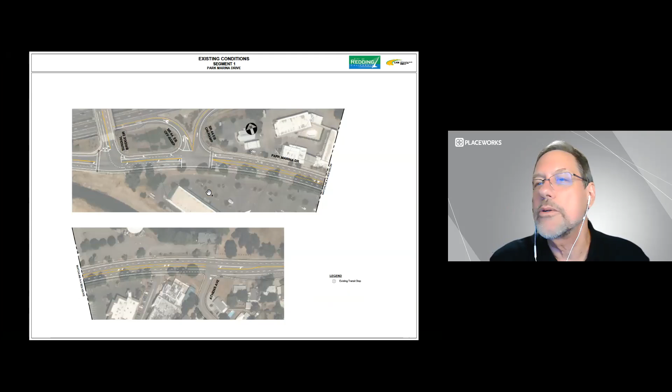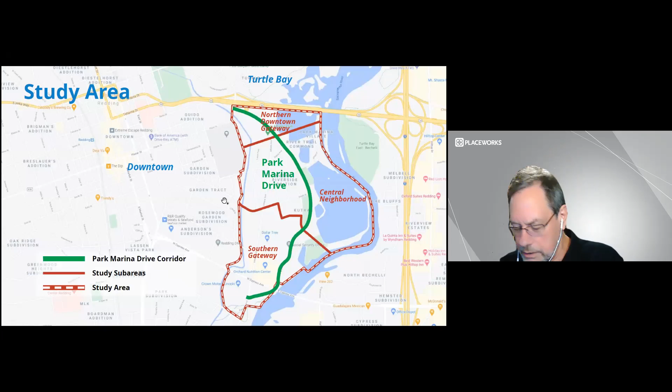Okay, so does anyone have, I guess I'll open it up. Does anyone have any questions or comments about the overall study area or any general questions? Feel free.

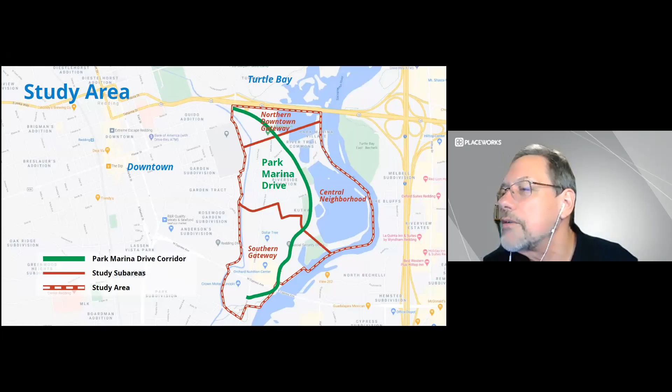Yes, okay, so I saw someone with their hand up. Can you unmute yourself and just ask a question? Hi, my name's Carol. Hi, Carol.

The thing that I'm curious about is it seems like all of this is kind of contingent on what the ideas are going forward on how the space along the river is going to be used, because that would make a huge difference in how the road is planned and whether there's parking along there or how that's done. So is there some kind of a plan in the works, or can you tell us anything about that?

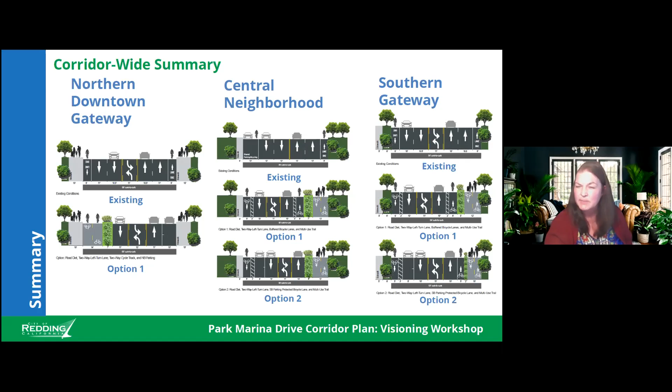So I think John could probably tag on to this. I'll start. We do have the grant. There's unknowns about what's going to be happening along the river, and we do want to find ways to improve the corridor as much as we can for the existing conditions. So the team is trying our best to make a solution that would be flexible for new development that might come in the future, to take advantage of the corridor as well. So the idea here is trying to keep it as flexible as possible.

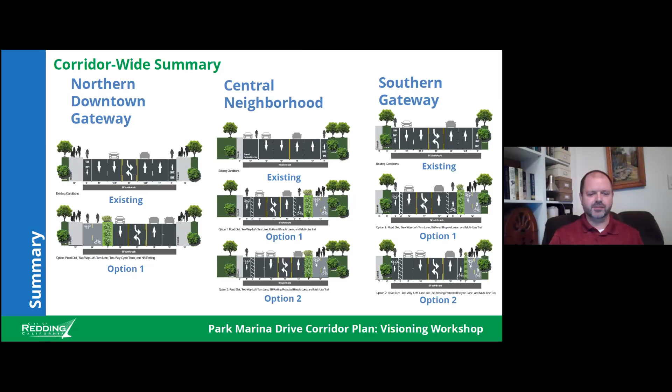John, do you want to add to that? Yeah, that's right, Bruce. We don't have any particular development in mind. We just know that in general, in the future, there will be development there. So these concepts just try to accommodate future development as it occurs, but we don't have any specific development in mind. The idea is to bring the bicycles and the pedestrians and serve the vehicles in a safe and attractive way so that it can help enhance the development that may be coming in the future.

Bruce or John, if I may, sorry, I'm not finding my icon to raise my hand, but my name's Cameron Middleton. I'm a representative for Chris Koutras, and I can address that at least slightly if need be. Okay, Cameron, why don't you talk a little briefly about that?

So maybe people should be aware that the Koutras family does own and control some of the property along Park Marina Drive. Go ahead, Cameron. Yeah, Bruce, I just had spoken with Chris about this prior. The Koutras family owns not all, but the majority of the property on the east side of Park Marina, coming from 44 down to just prior to Locust. So just give a little update from his standpoint.

Two things. One is the area has been encumbered by leases and subleases for some time, generations, frankly, and those leases are expiring at the end of the year. So what we are currently working on right now is that transition, which is actually fairly complex. Again, a lot of tenants and subtenants that are being talked to, just to ensure a smooth transition at the moment. And so that has really been our focus here in these past few months and in the coming couple of months.

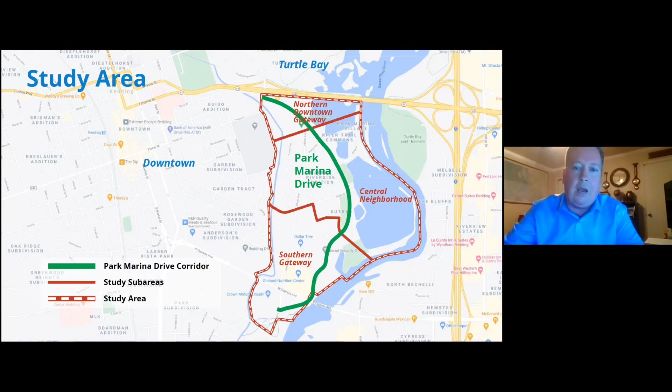Okay, thank you Cameron. Let me say a couple things about that. Clearly that's an effort that will probably take years if there are to be significant changes in the corridor. Tonight's exercise is really to look at the street itself, knowing the team will need to coordinate with future land uses as the project continues, and the city into the future, even after the project is in plan form, which will be middle or late-middle next year.

So it will be good for us to get your input about the corridor in these segments, to get a general idea of what you prefer to see in the Park Marina Drive corridor within the street right-of-way. In the future it will probably need to be adjusted to accommodate any changes, but it's a worthwhile exercise, I believe, to go ahead and do some visioning about what would be appropriate for the corridor.

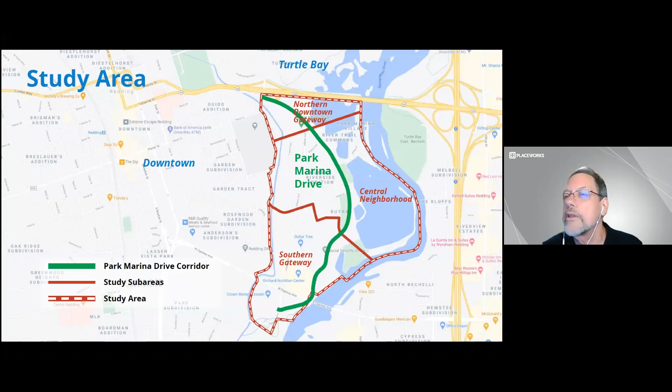I guess, okay, this is Ann Thomas. Maybe I'll just make a quick comment. Given the business uses we expect, as Cameron was just describing - restaurants, tourism, hotels - what I really like about the different examples you've given us, and what we see here, is that you're continuing the trail-like experience all the way along this corridor, which is so important to tourism. It's really essential that no matter which one we pick, we keep that trail-like experience for people of all ages, for the businesses that Cameron and Koutras are looking to the future for.

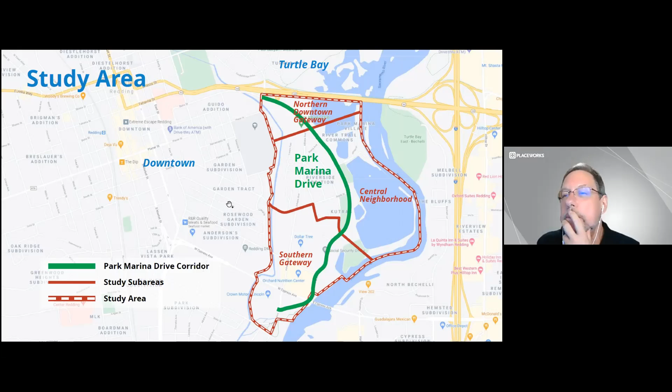Well said, and good to keep in mind. I think that's a great segue. Why don't we talk about some specifics here, I'll start. So again, this is the north end. Here's the on and off ramps of the 44, and this is the Sundial Bridge Drive, okay?

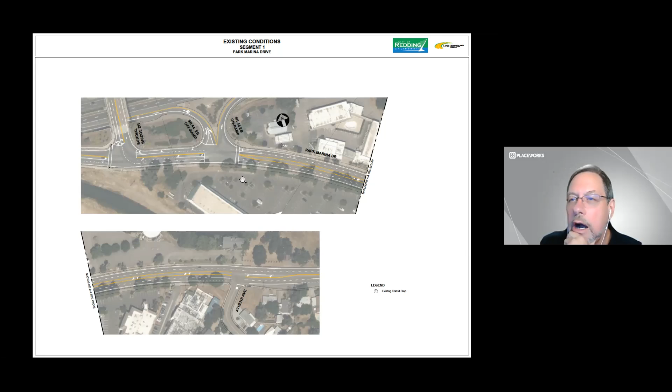There's a separate project happening over here to improve Butte for bicycle access that the city is doing. So this is going to become, or has the potential to become, an important piece of the network of bicycle connectivity. Looking at the concepts...

In this case, this gray line right here is a two-way multi-use path, so it would be usable by cyclists and pedestrians. There's a buffer between traffic and the path in this scheme. There would be other intersection improvements, such as a crossing here, and the city's plan is to bring bicycle connectivity here on this side of Butte, I believe - well, no, it looks like it's going to be on this side.

Okay, and then it'll cross Butte or Park Marina and go across the bridge. So this needs to be a good crossing - a good crossing for pedestrians - but really the major effort here is going to be this multi-use path along the west side of the street, continuing along to a roundabout at Athens Avenue. You guys are familiar, I think Redding has now done a couple of roundabouts. It's a great way to move traffic in a consistent flow, but not speeding.

So you don't wait at signals, but you continue through the roundabout no matter which direction you're going. And there's data that shows it's really safer, not only for bicycles and pedestrians to cross a roundabout, but also for vehicles. You find there are fewer accidents at a roundabout intersection than a signalized intersection.

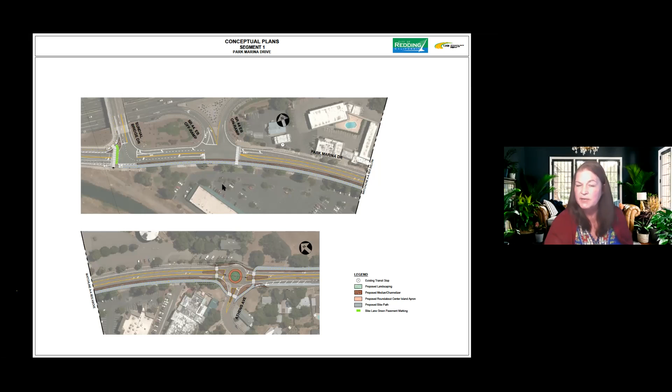I was actually not referring to over 44, I was just talking about these connections, these crossings that you have here now. Much smaller in type. Yeah, it certainly would be easier to achieve a pedestrian bridge, but studies show that oftentimes, unless you make it super easy to get up on a bridge to cross, most people would rather cross at grade than go up and across a bridge. That's findings people have found from other locations. But oftentimes, if a bridge could be made so that, say, some topography allows you to walk straight across, that would certainly improve the benefit of it.

Do other people have any ideas about a pedestrian bridge, support or non-support? Who else wants to talk about that?

Well, this is Anne. I kind of agree with what you're saying about a pedestrian bridge seeming more trouble than it's worth to people when they're walking sometimes. And it's costly to make it also serve people on bikes. Not that, you know, but if we have the money, maybe that's an interesting idea.

What I like about what you've done here is that you make the crossing with the roundabout. So we know we need to get people to the other side of the street so they don't cross in front of 44 and the on-ramps. And what's often not recognized if you're not here is that heading towards Turtle Bay, that's also a hill. So non-athletic cyclists don't want to climb that hill in the middle of traffic. With the roundabout, you make it easy for people to cross to the other side of the street, whether they're walking or biking, and make that hill climb in a safe space.

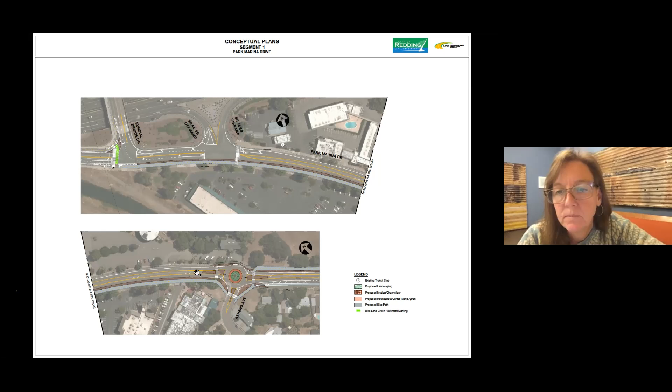Yeah, thank you, Anne. I don't know that I fully pointed that out, but what she's talking about is the natural place for a trail - we'll see this in the central and southern segment - is really on the eastern side, the river side, right? You'd rather bring that trail all the way up Park Marina Drive, but then you reach this point, and this is a very dangerous intersection for pedestrians and bicycles to cross.

So if there is a roundabout, there's a way to bring the trail users up and across and continuing up on the other side of the street. So it would be, you know, order of magnitude safer for this configuration. So thank you for pointing that out.

Other thoughts? Anybody about this segment? Bruce, this is Julie Winter, and so I would agree with Anne. I think what you've laid out here is actually excellent. I like the multi-use path, and this looks safe and reasonable for cost. So I would echo, I think this is a great plan going forward for this section.

I do want to point out Kathy Kakiuchi is on the call, and her microphone's not working. She asked 2 questions, Bruce. One is, will the streets be maintained, this project be maintained by the city? And the second question was, was an environmental study done?

Good question, I'll leave that to you. John can pitch in, but this is all proposed to be in the right-of-way of Park Marina Drive. And it's city right-of-way, so the city would maintain, they currently maintain, and they would continue to maintain. John, is that correct? Yeah, that's correct.

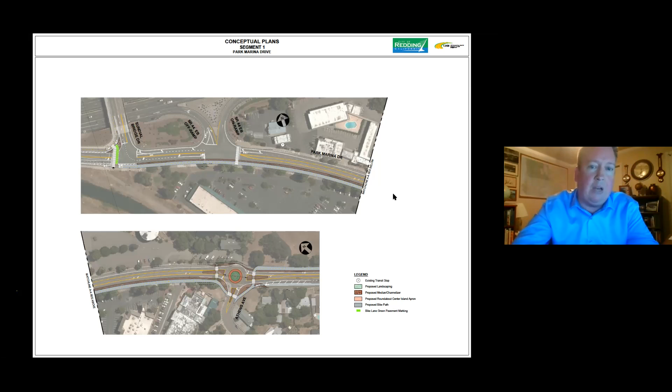I just want to echo Janice's concern a bit, with regards to backup both on Butte to the west and also on Park Marina to the east, and therefore 44, which we already do get. I wonder about the constriction of that northbound lane for some of those larger, well-attended events we have at the Civic, and what that may do in terms of backup.

Thank you for that, Cameron. Clearly there will need to be analysis to make sure things will work, not only day-to-day, but given there used to be, and hopefully in the future will be, fairly large events in Turtle Bay. I think that's an excellent point too.

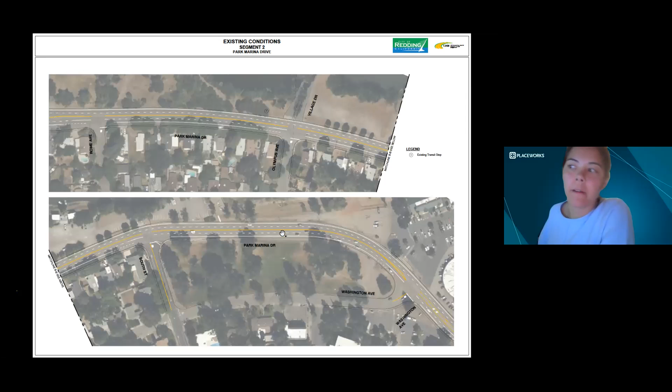This is an interesting concept in the middle. Kutras Park is here. There's an idea about having the multi-use path and also a cycle track on the street. So a bike lane in one direction and a cycle track on the other side, with parking remaining in front of the houses. The bicycles would run between the parked cars and the curb in this concept.

I mentioned the multi-use path on the riverside of Park Marina. So, yes, anybody want... okay. That is a concept we're looking into.

The other concept is potentially diverting traffic onto South and Washington going south, or onto Washington and South going north, to allow for a more capacious Park Marina Drive, with more potential for transit, bicycles, and pedestrians to use this segment. So that's the concept we're looking at: one concept without this bypass, and then the concept with the diversion and the bypass. Thoughts, anybody?

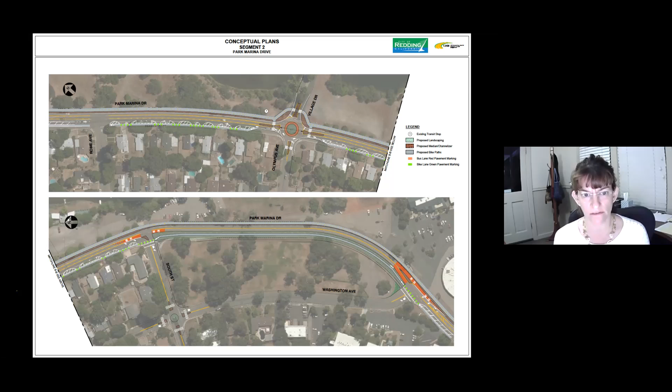On the top segment where the roundabout is at Village Drive and Olympus Avenue, I manage the 50-unit apartment complex on the northern driveway, and there are 8 residential units on the southern driveway of Village Drive that will soon be part of that ground lease that's expiring.

If by chance traffic makes a wrong turn off of that roundabout, if they get confused and end up on Village Drive, if it's an RV, a truck, or pulling any kind of tow vehicle, it's going to be ugly and possibly very dangerous because there's nowhere for large vehicles to turn around in there. There are carports that have been crashed into many times before, in both of those sections.

So I don't know if that can be solved with signage if this turns out to be one of the preferred plans. But that's something definitely to think about - it's a residential area, it's tight. If somebody makes a wrong turn in a big vehicle, it's going to be a bad situation real quick on both of those driveways.

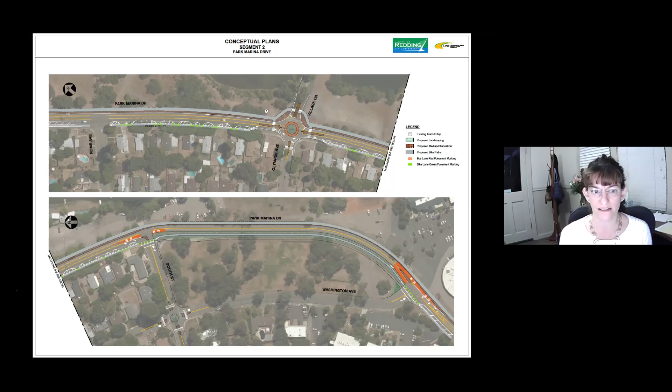You're a wealth of good comments. Michelle, are you able to capture that comment? Do you understand what she's saying, that an RV coming along here that by mistake gets on this street is really going to have a problem getting back out? I think that's very useful knowledge for us to have.

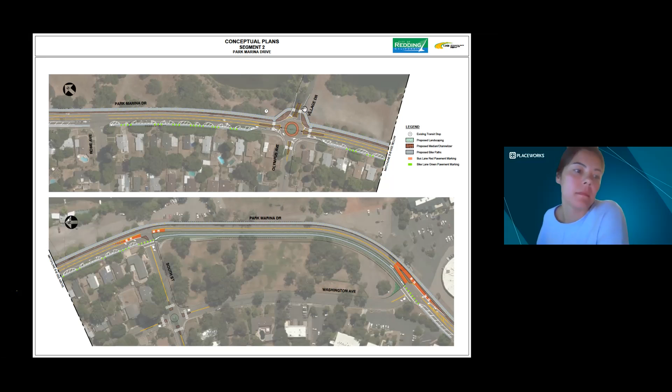I know we don't have a lot more time, but let's get some ideas about either the roundabout arrangement in this concept, or the other concept, which is mostly on-street and non-diverted. So, do we have Bruce?

Cameron? Yeah, two quick things. First, with regards to the diversion onto Washington Avenue, I know it's something Mr. Koutras has spoken about with the city previously, and something he'd like to look into is not only a partial diversion onto Washington, but a complete diversion onto Washington.

And I think that's something we would at least want to study and take a look at, thereby vacating that entire stretch of Park Marina from south to Washington and bringing all of the traffic through there, really opening up a larger contiguous piece that we would be able to take advantage of.

Second thing, with regards to roundabouts, generally speaking I'm an advocate of them and do like roundabouts. What I've noticed is that especially when you have two of them, what they do is very efficiently keep traffic moving, rather than stoplights, which actually stop and create gaps.

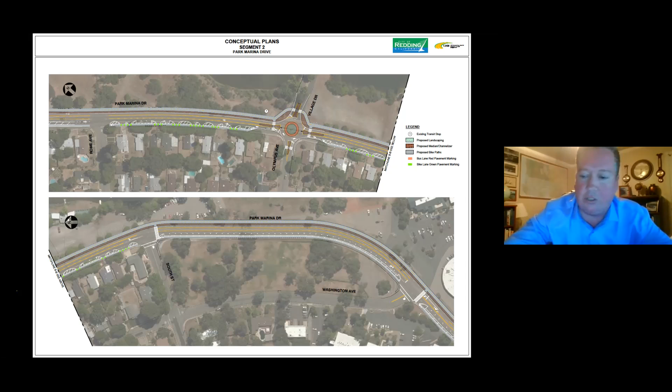That's certainly a good idea and something to move forward with. Okay, thanks, Cameron. Thank you. Let's hear from someone else. Who has a comment or a question about this segment that hasn't spoken yet? Is there anybody? Yeah, Bruce, this is Bob Getz.

Hi, Bob. You know, I've listened to this, and basically you're cutting from 4 lanes to 2 lanes. The earlier comment about COVID-19 is right on, that the traffic is lighter today than it has been in the past. I've seen backups off of 44 trying to get onto Park Marina, and if you cut that down to one lane, that's going to be an issue.

Roundabouts, I just don't feel it fits there. I know everybody's in love with them, but I just don't see it.

And I think the main thing, my comment, is if there is truly going to be development in, let's say, the next 5 years, or even the next 10 years, that would create — if there's hotels and restaurants and other things that the Koutras family would develop — that's going to create additional traffic. So you may have to revisit this and redo the whole thing at that point. I would really believe that it would be wise to wait a year, unless — I mean, the bike lanes are there today. I see them every day, bicyclists going by.

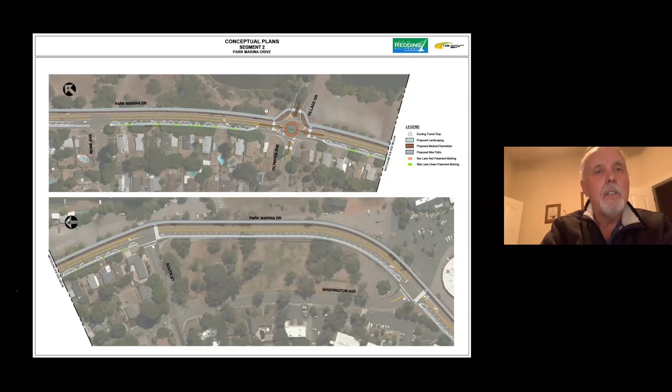The point you brought up a couple of times, a multi-use pedestrian bike path, that really doesn't work in my mind, because I walk the river trail all the time. So you have a differential of speed — bicycles going 20, 25 miles per hour, pedestrians going 2, 3, 4 miles an hour. I think it would be prudent to wait to see what the development plans are before you redesign, and especially put in roundabouts. Okay, thanks, Bob.

Anybody out there in the room that wants to say anything about what Bob just said? This is Ayla Tucker. My comments partially build onto Robert's comments and also onto Cameron's comments in regard to the roundabout.

I personally like roundabouts. I think when done in the right environment and the right way, they're great. I'd encourage extra thought if roundabouts are included in the end plan, that enhanced ADA features are considered, so members of the public who cross multiple crosswalks within a roundabout can do so safely. For those visually impaired or more immobile who cross at a slower pace, I'd encourage features that go above and beyond typical ADA compliance, to ensure the safety of community members so they can fully enjoy this Park Marina Drive area. That was Ayla.

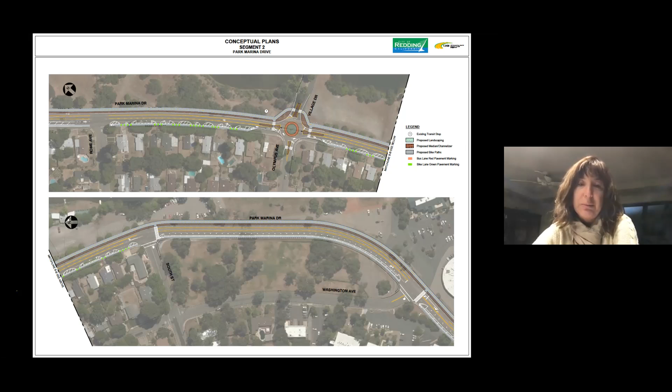Okay, thank you. Anybody else have anything to say about the number of lanes? This is David Schlegel, I just joined tonight. I think there's too many lanes on Park Marina right now, it's way too car-centric. If we're going to make it a place for people to gather, and if they're going to develop the waterfront, we need to slow down the cars. We can still have parking, but we need shorter crosswalks for people to go back and forth, and more space for bikes and people. That's how you create vibrant places.

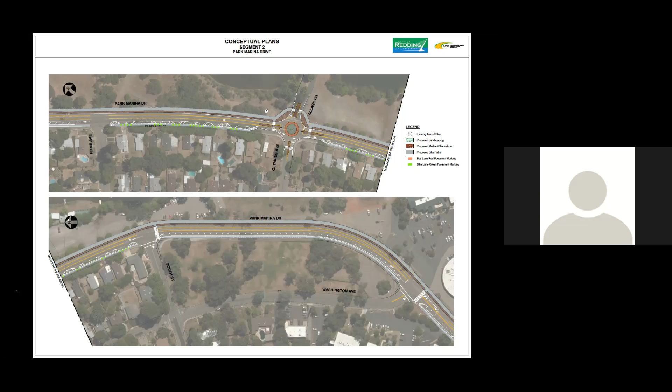Okay, thanks David, anybody else? Yeah, I want to echo that. This is Joshua Johnson. I like the roundabouts for a lot of reasons, but one thing I wonder is what the data shows, roundabouts versus stoplights. I haven't seen that, and whether it actually allows for fewer lanes because the flow is better. Do you have any of that data to share that might help inform us?

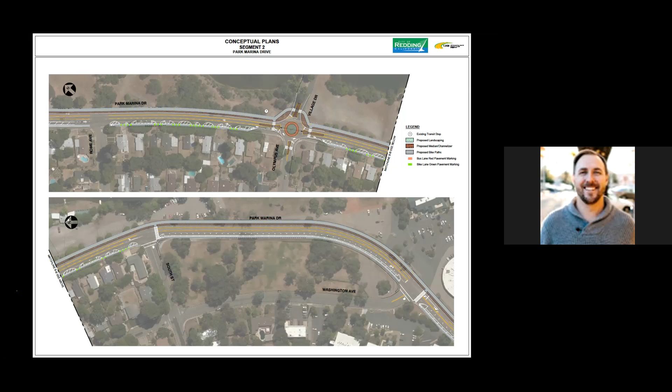Yeah, maybe we could bring that back after this meeting, in consultation with staff, if we're going to continue with an alternative that has roundabouts, we'll bring back some data showing that. Oftentimes roundabouts are used in concert with a road diet project, it's pretty common, and they've been shown to work pretty well together.

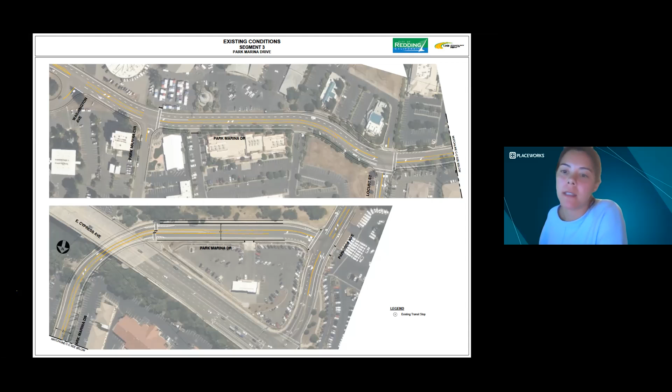Bruce, we just got a comment from Josh that I thought was interesting. He brings up the point about suggesting to bring art into the roundabouts. Art in the roundabouts, okay, that's a good comment.

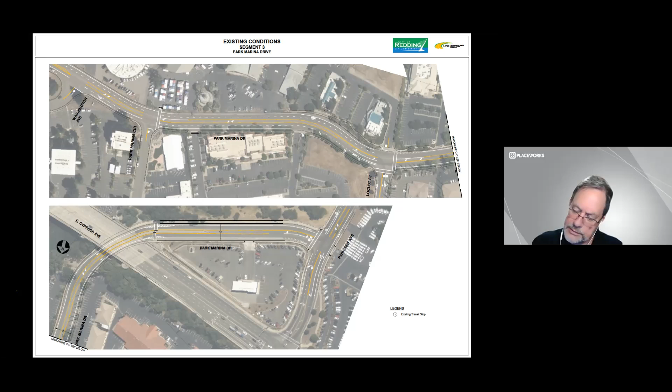If we have a quick second, I can chime in on the question regarding traffic signals and roundabouts. Okay, go ahead, who is this? Rudy with TJKM, sorry. Hi Rudy, I didn't recognize you. Okay go ahead, I'm just sneaking around through the break room, sorry.

So one of the things with the roundabout is it reduces the points of conflict within an intersection because it dictates the movement. Everyone flows in a consistent manner. So the entry into a roundabout is much more deliberate, and you're mainly looking out for traffic coming from your left side, compared to negotiating a typical traffic signal where you're watching for the lights, and you have a lot more conflict points depending on the type of signal you have. If you have a permissive left turn compared to a protected left turn, and then your right turning vehicles have to be mindful of oncoming traffic if they're making a right turn on red. So those are just a high level discussion on the main differences between them. We can definitely provide a more in-depth analysis on that further down the line.

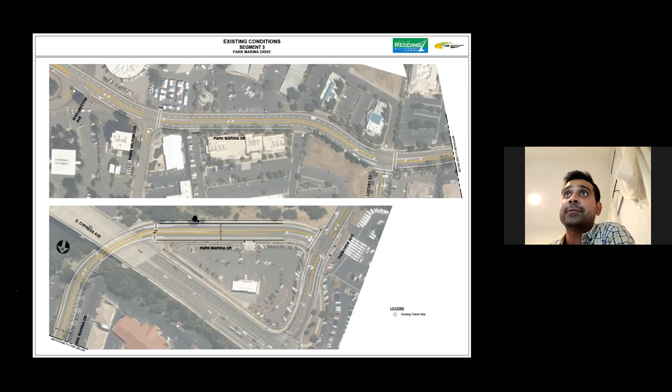Hey Rudy, I wanted to mention a good comment someone made about the first roundabout in the north, and it's worth looking into. There is a point that especially at event time, there's traffic that may back up onto Sundial Bridge Drive and back down Park Marina. I think it was Janice who was saying she's seen cars all the way down there. So it'll be good for the team to look into that issue to make sure cars don't back up even past the roundabout, because that would impact the flow there.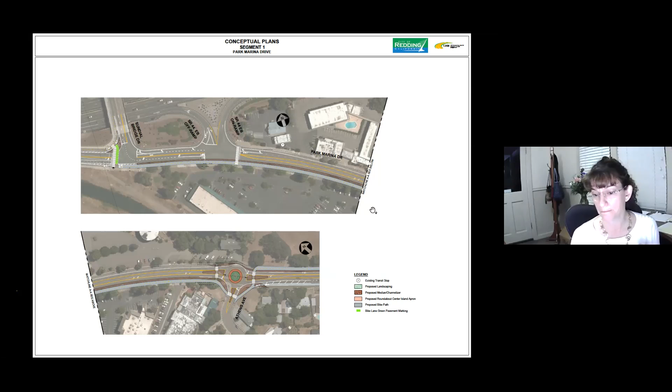That's a good point. So you're saying the queue from Sundial Bridge or from the ramps backs up southerly into the Athens Avenue intersection? Janice, for about a short time during non-COVID traffic patterns, maybe from say 5:05 to 5:20 p.m. Got it, okay, so that might be something happening with the ramps and the circulation up north. If we can improve that, that would help with the overall flow.

Yeah, I think it's a good point, and you don't want to do something that's not going to work at all times. So that said, we have 30 seconds before we leave the breakout room. Anybody else have a topic we haven't talked about? Is there anything else anybody wants to say about any of these concepts?

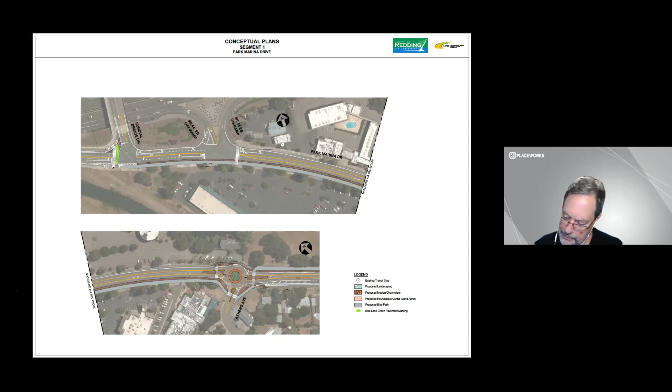Okay. So what we'll do... Hi there, I got cut off. I guess we're just forced to be back. Yeah, we were forced to be back.

Sorry, I hope you saw my broadcast message. I did, we did. It's hard to gauge, and I was in mid-sentence, so we got broken up, but that's good.

First of all, I think we had a great discussion in Group 1. Hopefully, let's see, are most people still in the meeting? It looks like there's 80 folks still here. So this is, what a great meeting.

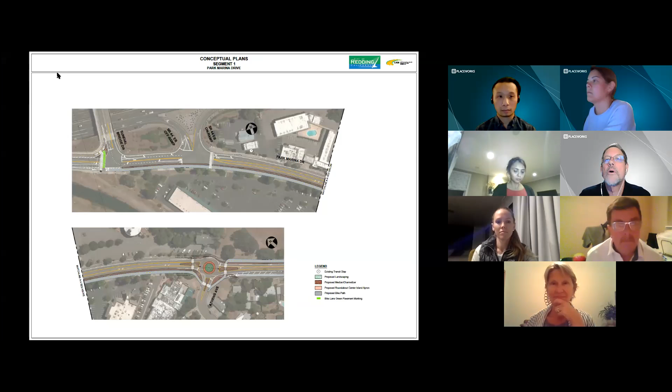And we'll start with Group 1 discussion. Michelle took these notes, we had lots of folks in the room. Should I go ahead and summarize? I've forgotten, Ruta, let's see. I guess I could just go ahead and summarize this. Does that sound okay? Yes. Okay.

So we were fortunate to have Cameron, who is associated with the Koutras family, talking about future development plans for the area along the river that the family owns, and said that they are developing plans now for that area, and it's exciting to think about some transformation there. There was some thinking or encouragement that the planning we do for the street should be flexible to accommodate new land uses in the future. It's not determined what those land uses will be or what the development actually will be like, and it won't be known probably for some little while because of the situation we're in with COVID and so forth.